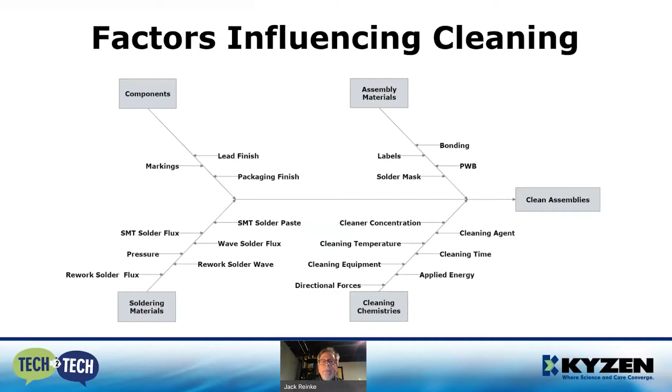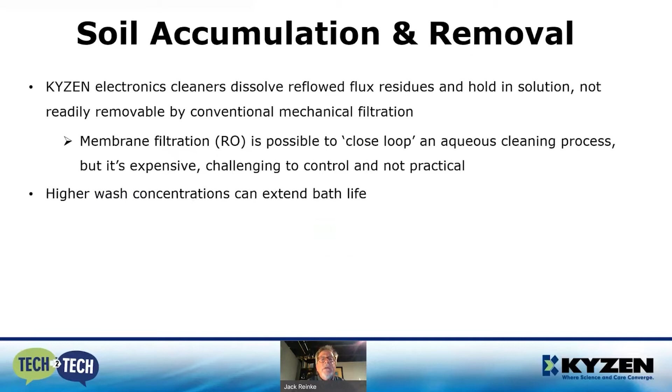KYZEN's electronics cleaners are designed to dissolve reflowed flux residues and hold them in solution, so they're not readily removable by conventional mechanical filtration. Membrane filtration or reverse osmosis is possible to close loop an aqueous cleaning process, but it's expensive, it's challenging to control, and not very practical. So inevitably, open the closed loop and send something to drain, the best option over the sophisticated membrane technology. The good news, however, is high wash concentrations can serve to extend wash bath life, and I'll talk about that a little bit later.

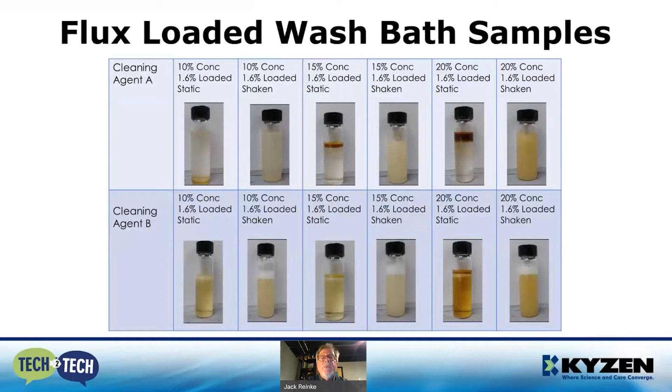Here we've got controlled flux loaded into several cleaning agents mixed up at 10, 15, and 20% concentration. And under both static and shaken conditions, you can see the rather dramatic difference in the appearance of these materials. These are clues to how free rinsing these wash solutions will be when loaded up with about 1.6% flux.

Every cleaning process reaches critical saturation, or a point when the dissolved soils start to affect cleaning, and more importantly, when those dissolved soils start to hinder rinsing. Using surface tension, shown on the left, and a contact angle measurement device on the right, we can assess the rinsability of wash solutions when fresh and loaded.

In this case, cleaning agent B shows a lower contact angle and a higher surface tension than cleaning agent A. Those two factors, the lower contact angle and the higher surface tension, mean that wash solution will rinse easier. So hence, cleaning agent B, in this case, will rinse more freely or better than cleaning agent A.

This is from a study conducted jointly by Lockheed Martin and KYZEN for the SMTA High Reliability Cleaning and Coating Conference in 2018. And for more information on the importance of rinsing, you can look up a previous Tech to Tech by our Vice President of Global Technology, Ram Wissel, from last August, I believe it is.

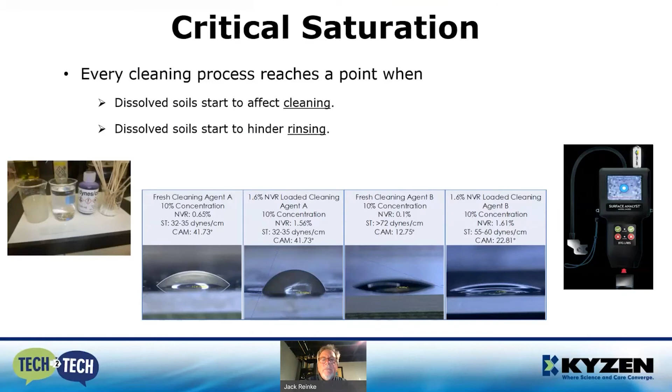Beyond reflowed flux residues, we know there's a lot of other contaminants that get into the wash bath, including but not limited to water-soluble masking tape, solder mask, adhesives, Kapton labels and arrows, raw solder paste, which is never supposed to go into the wash bath, but oftentimes does, tiny screws, and even stray components that get knocked off assemblies. Most of these particulate contaminants are removed in circulation filters, catch screens underneath the wash chamber, or even the strainer on the wash pump uptake.

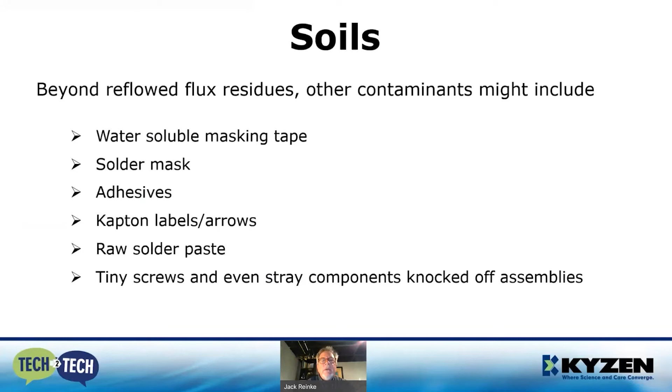But bath life is based on dissolved flux residues in solution at a specific rate dependent upon the cleaning agent concentration, bath temperatures, and spray pressures. You can measure flux load by non-volatile residue, or NVR testing.

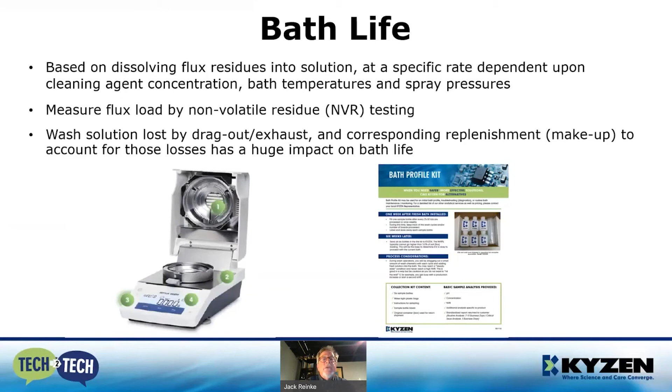You can do that in-house with a device like that shown on the left, which is a Mettler-Toledo moisture analyzer. Generates results in minutes, or you can collect wash bath samples and send them into your chemical supplier for full analysis, including NVR. But wash solution lost by drag out, exhaust, and the corresponding replenishment or the makeup required to account for those losses has a huge impact on bath life.

Let me explain. Here's an example of linear soil loading. This would be in a static system where you have a ceiling or a critical soil load. As the soils are loaded in over time, it's a straight line relationship. We know exactly where it's going to reach critical load and wear out the bath.

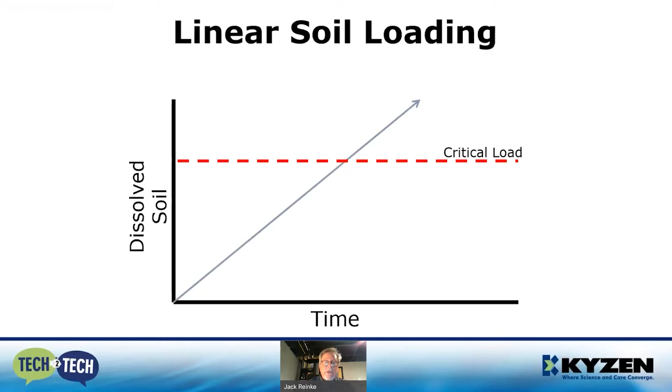We know it's not a static system though. All of these cleaning systems are dynamic, and because we have drag out and makeup to consider, we can actually manipulate the loading rate. Drag out and exhaust losses.

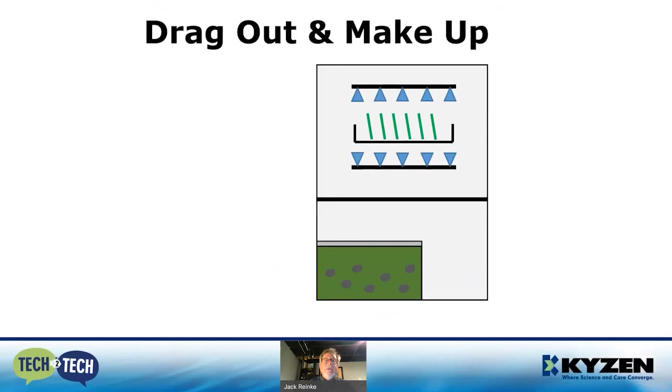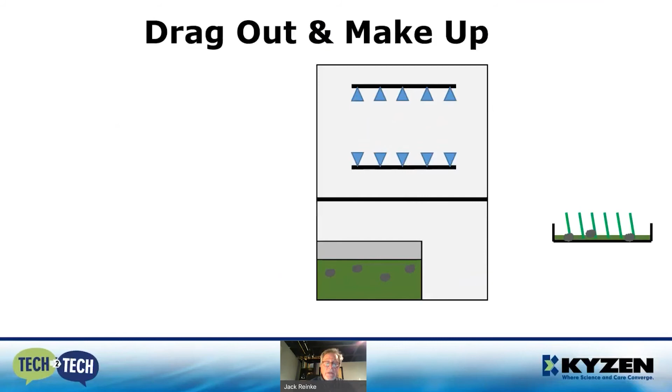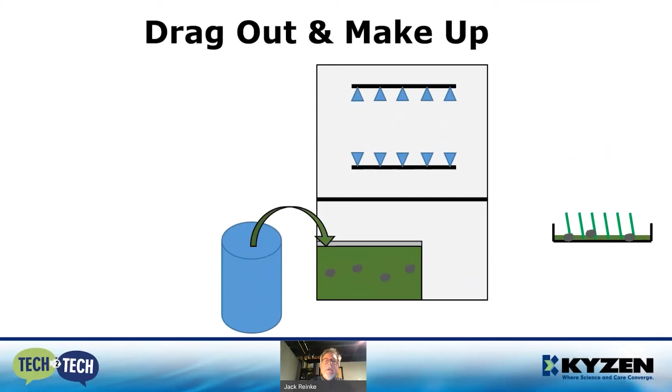This is an example of how drag out takes place, where the soil laden wash solution is on the part. A certain fraction of that wash solution exits on the part, then has to be made up with fresh chemistry and clean water. So essentially, there's a purge that takes place continuously through makeup for drag out and exhaust losses.

So let's look at this now as a dynamic chart. Instead of it being a straight line as the soil loads, it's a curved line. You still have the critical soil level that you don't want to exceed, but now by increasing your drag out, you can actually drop that line. Another way to put it is you raise that critical soil load.

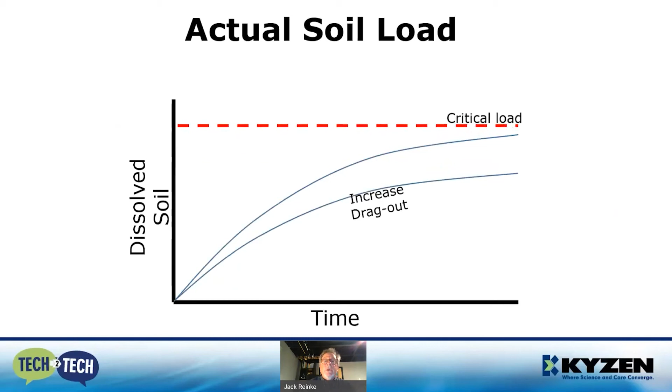So what does this mean in reality? Well, we can take this phenomenon and look at this bath life simulation. The chart on the left shows that the top line, the pink line, is bath life normal, where the machine is buttoned up tightly and running as low a concentration as possible, where loading reaches a critical soil level sooner. You see it cross over that straight line at about 4. This would probably mean changing out the bath more often, maybe weekly.

The second scenario, in the yellow line, is bath life optimal, where you have a little more drag out and exhaust loss. You're running a medium bath concentration, so you might have to change out monthly instead of weekly.

And then the best case scenario is a higher drag out, called controlled drag out, and a higher wash chemistry concentration, so that the bath reaches a steady state and never really gets to that critical soil level. So change outs really aren't warranted except during preventive maintenance.

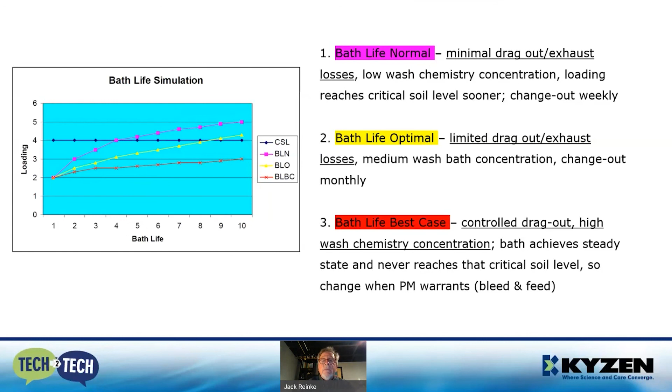This concept is known as bleed and feed. It uses a little bit more chemistry, but can avoid the rigmarole of frequent bath changeouts. This also gives some credence to the phrase, you never have to change out the wash bath, because in effect, you're turning that bath over regularly by your makeup for drag out and exhaust losses.

Wrapping up then, critical cleaning and defluxing circuit card assemblies is growing ever more important, demanding high throughput, long and effective bath life, and environmental responsibility.